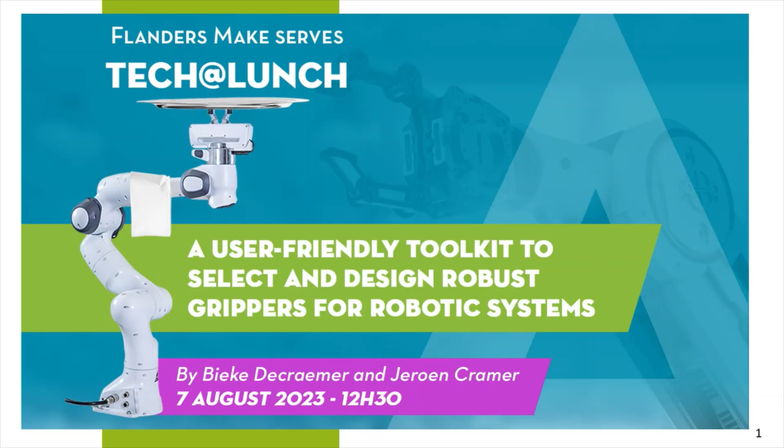We would like to welcome you at our Tech at Lunch webinar about a user-friendly toolkit we developed to select and design robust grippers for robotic systems.

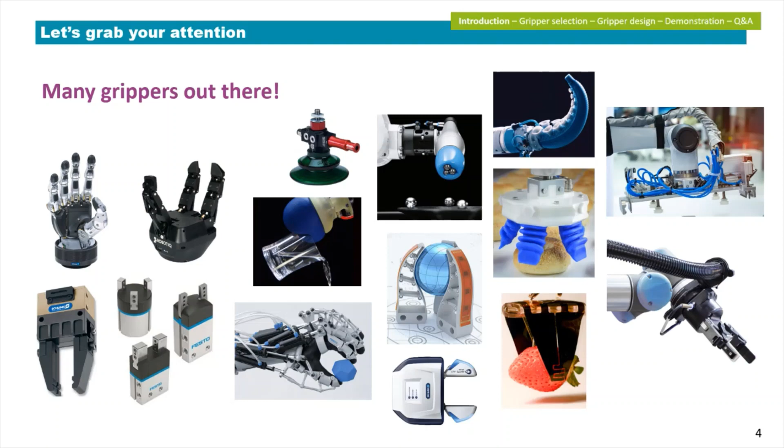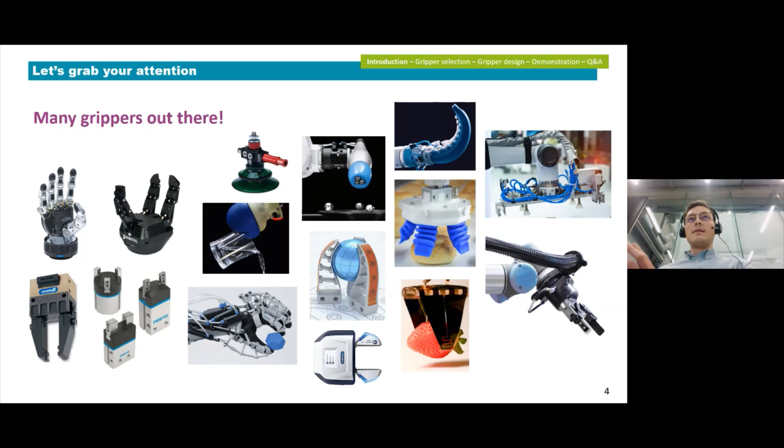Now, why do we focus on an assistive tool to develop robotic grippers? When you consider the shift towards more customized products, as well as soft products like food or textile, and the deployment of robotic grippers in more dynamic environments, like, for instance, human-robot collaboration, you can see that the expected functionalities of robotic grippers are evolving rapidly and are pushing both industry and academia towards the development of more innovative robotic grippers.

These developments are also endorsed by several market intelligence providers. They demonstrate that robotic grippers are a billion-dollar industry and still have a growth potential for the upcoming decade. This should come as no surprise because companies are increasingly optimizing their production efficiency on their production floor by integrating industrial robots which interact with their environment by using robotic grippers as an interface.

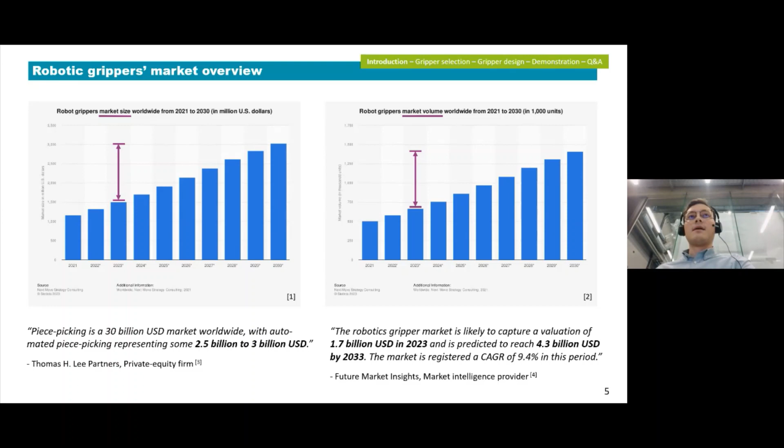But besides those economical advantages, there are still some financial and practical challenges ahead. For example, no less than 15 to 70% of the total product cost is spent on handling, for which the gripper cost can even reach up to 20% of the robot cost. So the performance and the durability of a robotic gripper are strongly influenced by the properties of the part to be handled and the task to be executed. So a well-thought gripper selection and design is of significant financial importance.

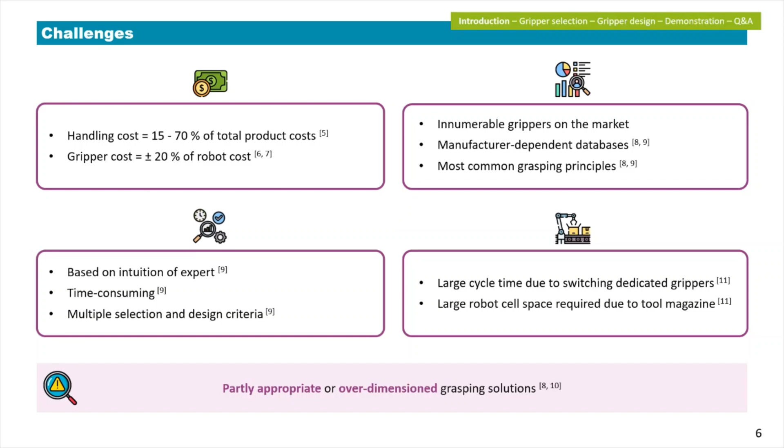Nowadays, in industry, gripper selection and design are mainly done based on expert knowledge due to its intuitive, ad hoc, and time-consuming nature. More specifically, innumerable grippers of various manufacturers are on the market, and multiple selection and design criteria need to be taken into account. In addition, gripper selection is mainly restricted to the portfolio of one specific manufacturer of robotic grippers and is confined to its most common grasping principles like jaw grippers or suction cups.

Furthermore, when using a dedicated gripper to perform one specific task, for instance, grasping an object, the cycle time and robotic cell space will increase due to constantly switching robotic grippers from a tool magazine. So as a result, this approach is susceptible to additional costs, which are entailed by partially appropriate or over-dimensioned grasping solutions.

Our toolkit tries to provide an answer to this by first providing a gripper selection tool, which is linked to a manufacturer-independent database consisting of more than 6,000 commercially available grippers, with the goal to assist inexperienced persons in a user-friendly manner. But for this, the standardization of grasping principles is required, as well as the standardization and limitation of selection criteria. This gripper selection will then result into a list of feasible grippers for the family of objects that are given by the user of our toolkit. These objects could range from 3D mechatronic parts up to 2D sheet metal parts, or even soft organic products.

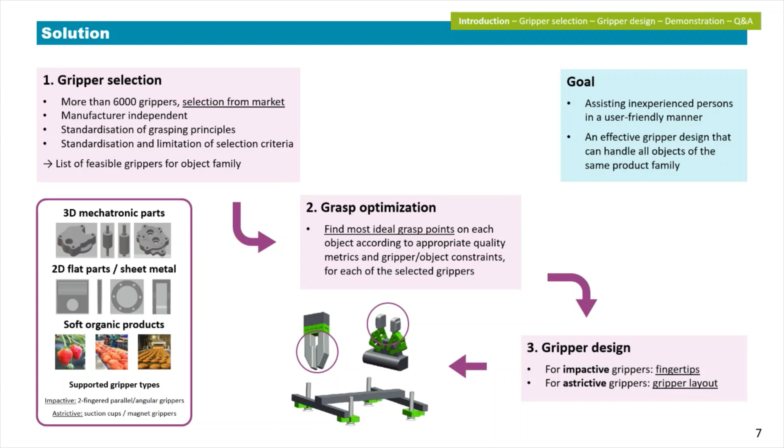Then, in the second stage, the grasp optimization will find the most ideal grasping points on each object for all of these selected grippers, based on quality metrics and constraints about the gripper and the object. And then finally, this will result into a gripper design that can handle all the objects of the same product family. For impactive grippers, which generate a contact force on the object, this means the design of fingertips. For astrictive grippers, which generate a force field onto the object, this means the design of a layout of individually positioned grippers, as illustrated by the picture down below.

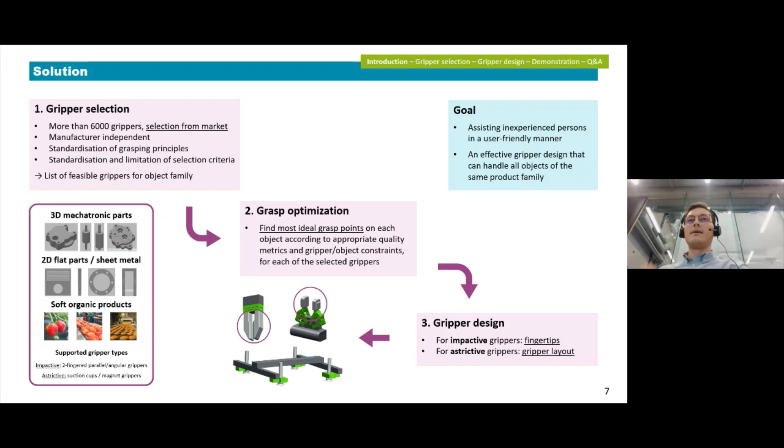The importance of gripper selection has also been noted by several gripper manufacturers. They increasingly provide accessibility to their product portfolio by offering digital catalogs on their websites, as well as assistive web tools. But with our toolkit, we would like to take this a step further by not only focusing on one specific gripper type, like impactive grippers, and also not restricting ourselves to one specific manufacturer.

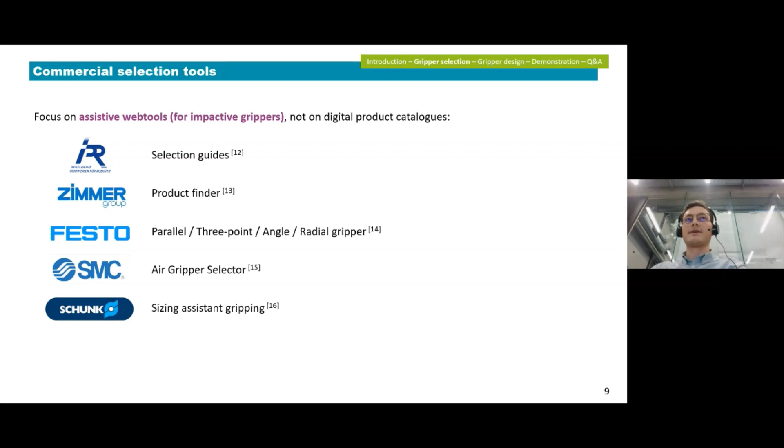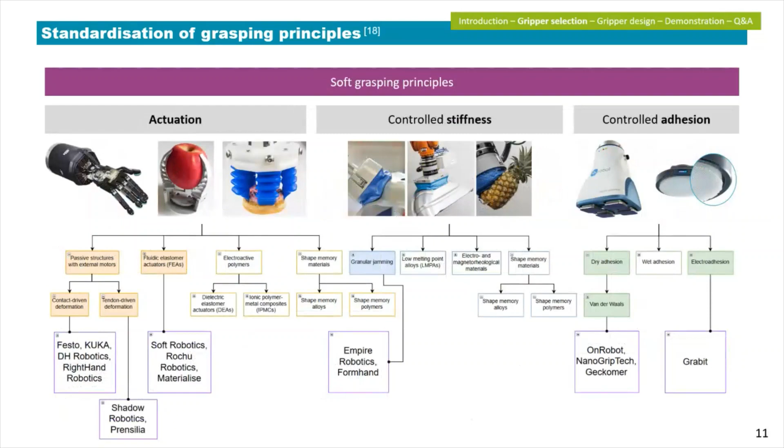This is done by first integrating this standardized tree diagram for conventional grippers as well as soft grippers into our selection methodology, and limiting selection criteria to the 35 most important ones, which we derived in close collaboration with our industrial partners, and dividing these selection criteria into 5 categories: the object to be grasped, the task to be executed, the environment in which the robot operates, the robot itself, and some gripper parameters.

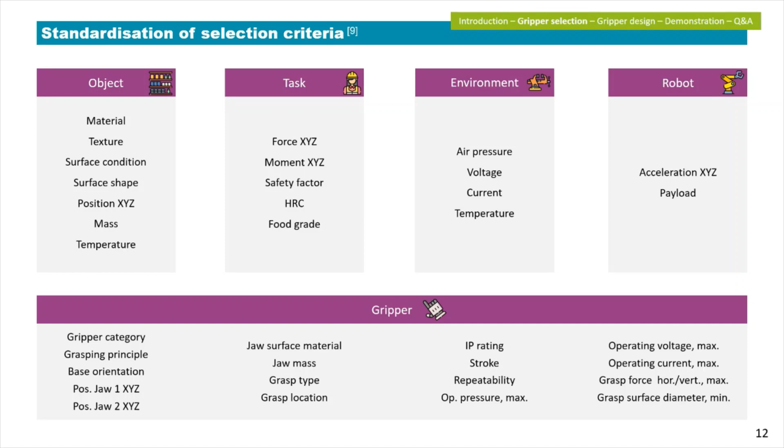This will result in a pipeline for our selection methodology that runs in 3 main steps. First of all, in the input stage in the back end, gripper data needs to be collected and stored into our database. This can be done manually or automatically by using web scraping of the digital catalogs of gripper manufacturers.

In the front end, the user has to specify certain values for the selection criteria he is aware of about his intended gripper or the envisioned use case. And then during the processing step, gripper selection is done based on rules which match the selection criteria with the grippers in our database. And this results in an interactive output.

First of all, a 2D scatter plot in which you can interact, or a data table which allows some additional filtering and gives a direct link to the website of the gripper manufacturers. Then finally, in the table on the right-hand side, you can see an overview of the various gripper manufacturers and grasping principles that are currently stored in our database, which contains more than 6,000 commercially available grippers.

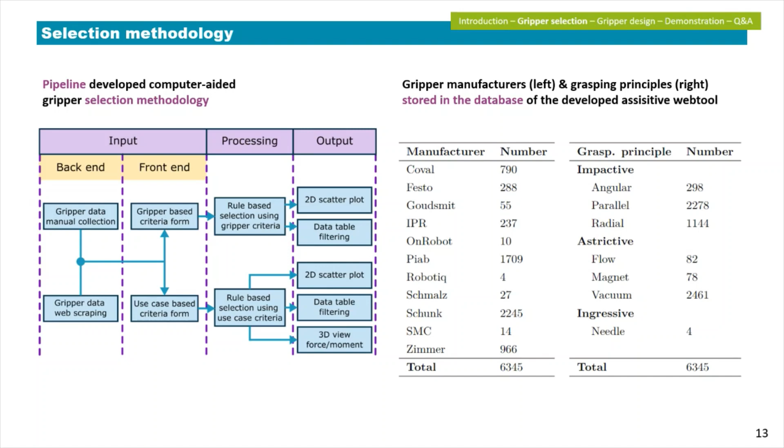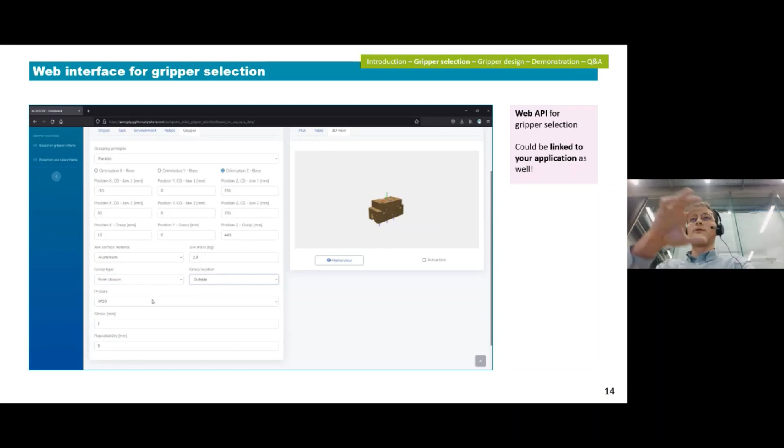And for this selection methodology, we created a standalone web interface that on the right-hand side allows some interaction with a 2D scatter plot and an intelligent data table. And a gripper selection is done based on the values for the selection criteria the user has to provide on the left-hand side. And the selection criteria are divided over the 5 categories I mentioned earlier. This 3D view allows us to provide some forces and moments on the gripper.

And finally, we get a hit list of feasible grippers with a direct link to the website of the gripper manufacturer, where you can order the gripper or where you can get in contact with the gripper manufacturer's sales department. Then finally, I would like to mention that we also created a web API for our database and the selection tool, which is linked with the design application you will see in a minute. But this web API could also be linked with your application as well.

The next step in providing a good gripper solution is then, for the gripper that Jeroen selected with his tool, to make a good design for it. This falls into two categories. On the one hand, we will design fingers for the impactive grippers that were selected. And on the other hand, we will design layouts for the astrictive grippers, such as suction cups, which are selected by the selection tool.

How do we do this? Well, this is a two-step process. First, we optimize the exact location on the objects where we want to make the gripper contact the objects. First, we need as input the objects and the selected grippers of the selection tool. As a first step, we then reduce the objects to the feasible contact surfaces. So we find all feasible contact points between gripper and the objects.

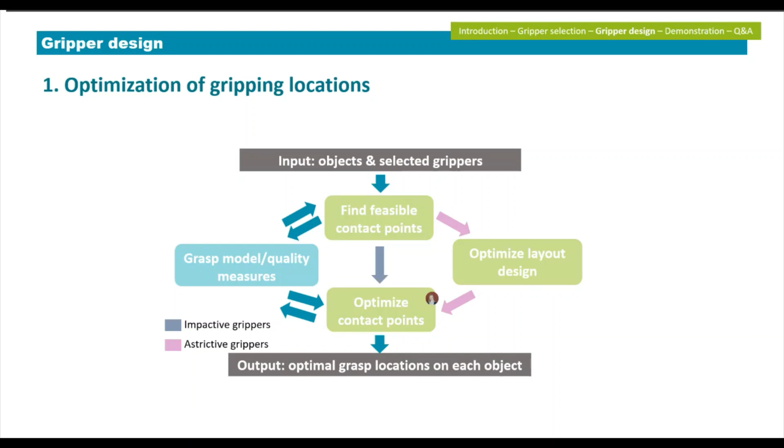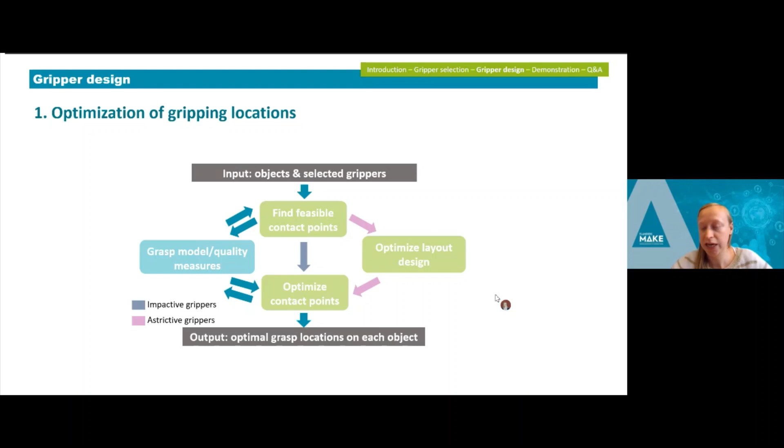Next, for the astrictive grippers, we go into layout optimization, where we first optimize how the layout of all the grippers needs to be together. And then finally, for both impactive and astrictive grippers, we optimize the exact contact point where the gripper needs to make contact with the object. For all these steps, we are helped by grasp modeling and quality measures, which take into account the physical properties of the gripper making contact with the object, and that way finding good grasps. As an output of this optimization, we finally get the optimal grasp locations on each object for a certain gripper.

As a first step, as I said, we just need to find the feasible contact points. Here I took an example of a 3D mechatronic object, which we want to grasp with an impactive gripper approaching from the top. This means that there are certain constraints placed on the object where we can grip it. If we approach this object from the top with an impactive gripper, this impactive gripper will have a certain maximal finger length. Let us say that this is this length, then you can see easily that this puts a constraint that only the top surfaces, limited to here, are graspable by this gripper.

Additionally, we also want to stay away from sharp edges, because we know from experience that a grasp at a sharp edge is bad for grasping. So that's why we also limit to all contact points which are far enough from a sharp edge, which are here indicated and recognized automatically as the lines in blue.

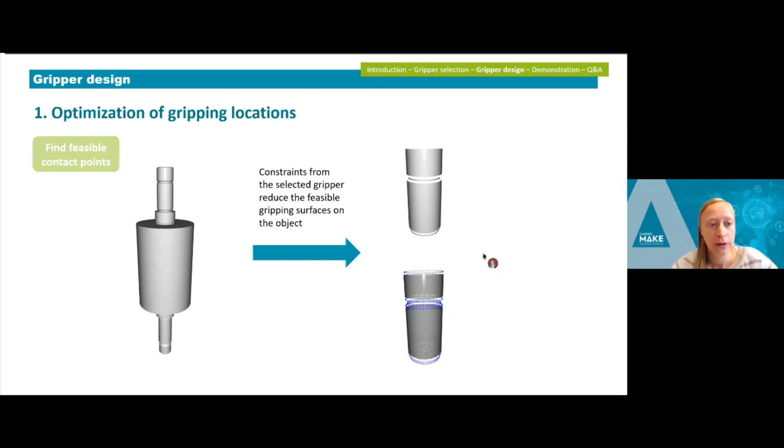Then next, we want to optimize the gripping locations. First, for the astrictive grippers, we want to find the optimal layout design. And for this, we need to generate first a lot of feasible candidate grasps for each of the objects. So say that we have 4 objects, we generate a large number, up to 200 or 500, depending on how big and how long you want to optimize for, of feasible candidate grasps for each object, and then we parameterize each grasp by the set of distances between the points.

So here we are actually trying to find a layout of 3 points. So for example, 3 suction cups, and then we parameterize them by 3 distances between these 3 points on each object. Finally, we optimize a common grasp, here depicted in pink, that is most similar to the best grasp on each object. And by most similar, we mean that the distance error between each of these 4 and the common grasp that we find is minimal. This way, we actually find the final layout design that we want to place on each of the candidate objects.

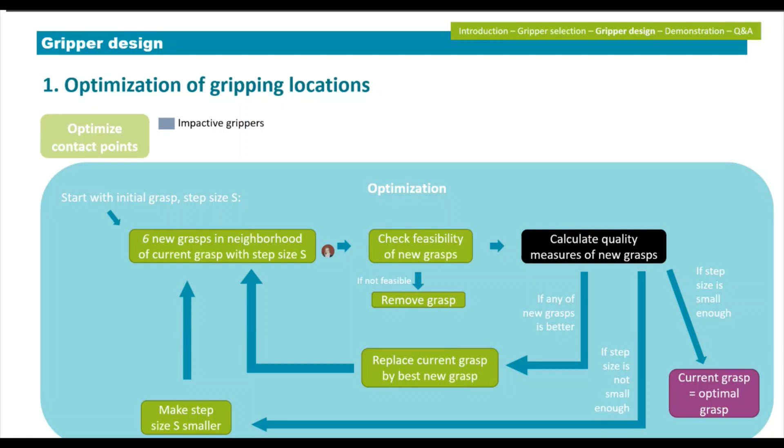For each of these 6 new grasps, we check the feasibility of the new grasp, and if it's not feasible, we remove it from the set. By the way, because we selected the feasible regions in the first step of the full optimization procedure, we know that there will always be at least one grasp in a neighborhood which will be feasible. So we will never get an empty set in this step.

For each of the new grasps, we then calculate the quality measure of these new grasps. And if any of them is better, then we replace the current grasp by the best new grasp and we start again to see if we can move further towards a better grasp according to the quality measure.

If we didn't find any new grasp to be better, we check if our step size is already small enough. If it's not small enough, we first reduce the step size and see if we can find in a smaller neighborhood a better grasp in the same iterative procedure. If the step size is small enough, then we say our current grasp is actually our optimal grasp on the object, and we have found our optimal grasp.

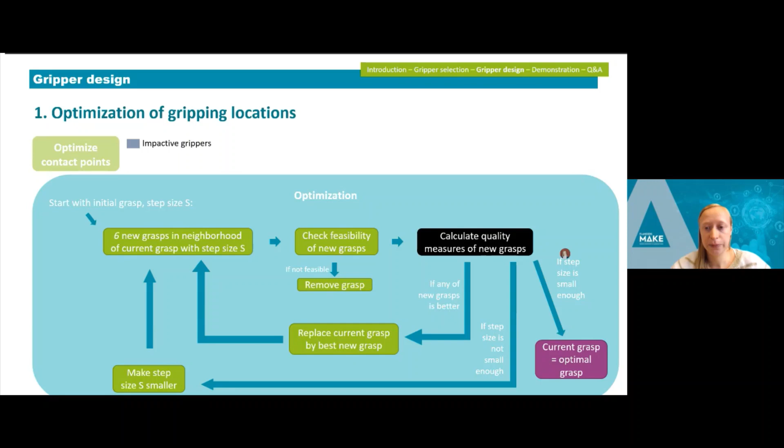For the astrictive grippers, we actually follow the exact same optimization routine, only there the quality measure with which we measure how good the grasp is on the object is now the distance between our candidate grasp currently on the object and the common grasp that we want to have as the layout of our gripper in the end. So this actually modifies the candidate object grasp to come as close as possible to the common grasp layout and thus create a gripper that can select all objects at the same time.

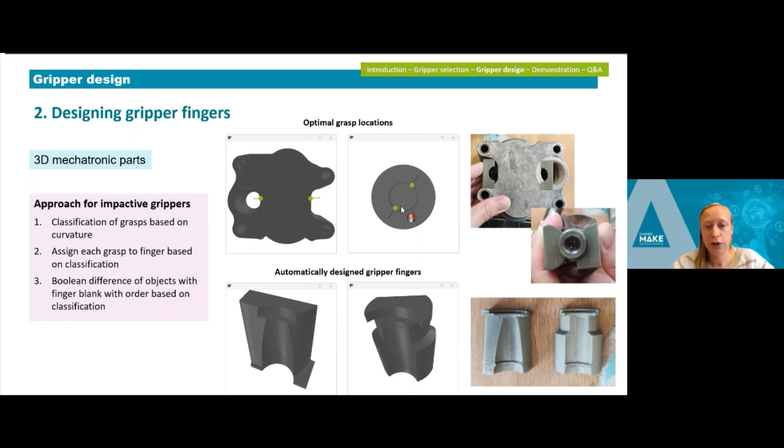Next, we want to actually also design the gripper itself from the best grasp location that we found on the objects. For 3D mechatronic parts, we mostly select impactive grippers. So for them, we want to design gripper fingers. We first do a classification of the optimal grasp locations that we found on the objects based on their local curvatures. This classification helps bring together equally curved grasp locations on the different objects, in this way making the most similar grasps be put on the same finger.

Finally, we do a Boolean difference from a finger blank based on an ordering, also based on curvature, and that way create an automatically designed finger. These are provided in STL format and can easily be 3D printed and also tested on your objects.

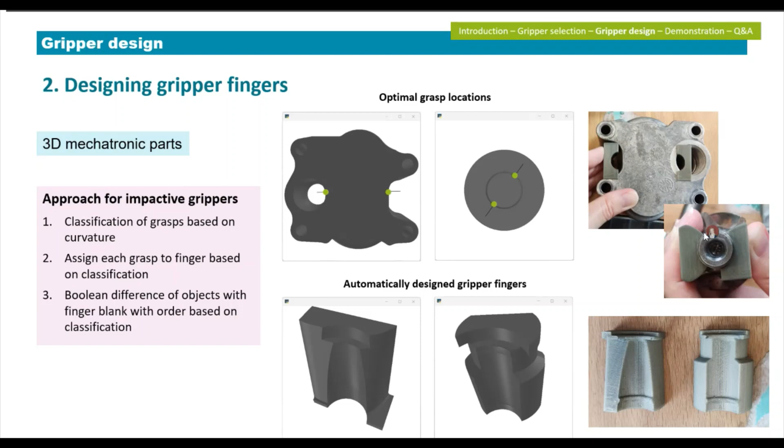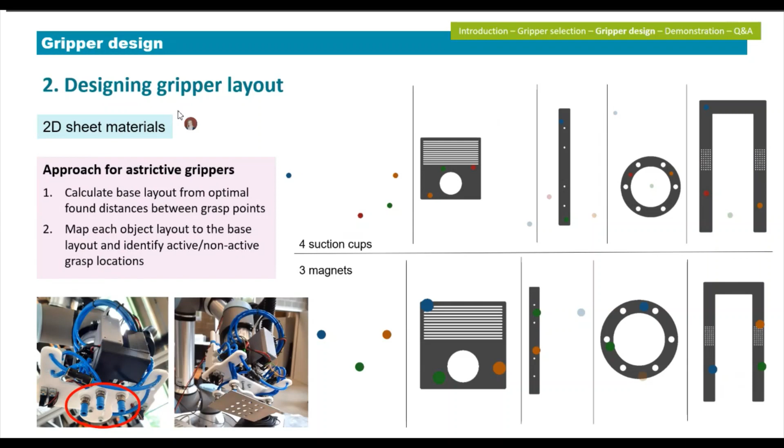For 2D materials, mostly sheet metal, but also other parts are possible, we calculate the base layout from these optimal found distances between the grasp points, and then we map each of the object layouts to this base layout. And you can also see here in the top example that we can activate or deactivate certain grippers. This gives a lot more freedom in your gripper solution.

Otherwise, this thin object would absolutely not be able to be grasped with the same gripper as this much larger square object or this circle. But playing with the activity of certain grippers in your layout can certainly help this.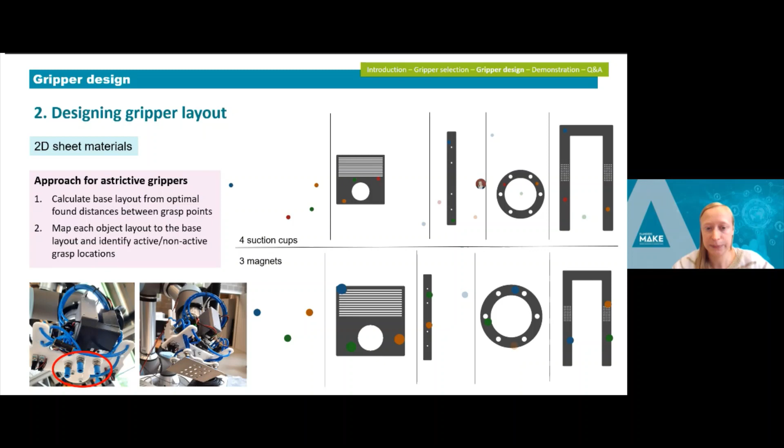Next, we converge all these solutions that we just presented, so the selection, the optimization, and the gripper design, into one user-friendly toolkit, which we will now demonstrate to you. So a first step that you can do with this toolkit is to obtain automatically the best selected grippers. For this, we first log into the database with credentials that you can get from us. If you provided anything wrong in the GUI, it will nicely show you in red, and if it's right, it will turn green to make it user-friendly.

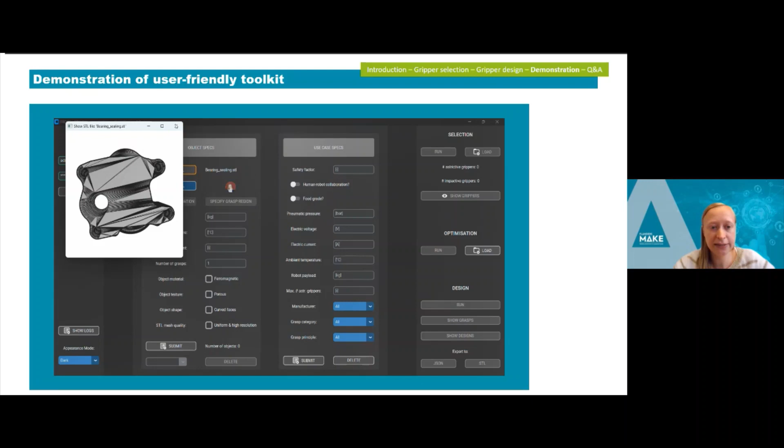Next, in the second step, you need to upload your objects. These are STL files of your objects that you need to load in. You can show the STL, and then you need to provide some object properties that will help us gain knowledge about the objects for the optimization and selection. Since this is a tool developed to handle product families, we want you to upload at least 2 different objects. That's why the submit button only becomes green after submitting at least 2 objects.

Finally, you can also delete objects. This you can do by popping open the menu where you see all objects that you have entered and then selecting one and deleting it. Next, we want you to provide the use case specification. These are the selection parameters that Jeroen talked about for the gripper selection.

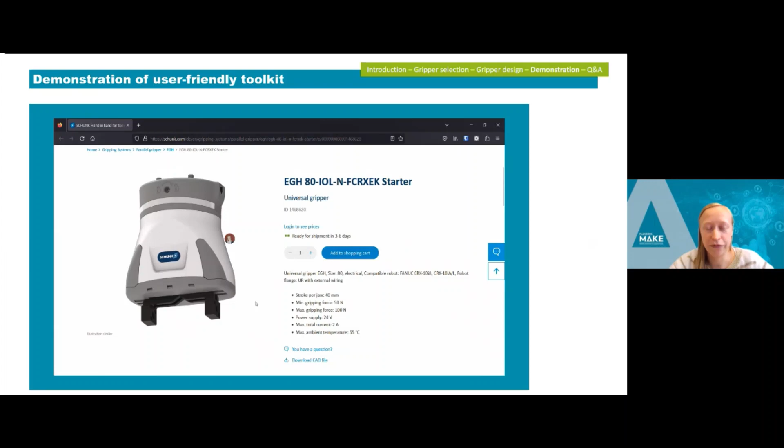And once you have submitted these, you can run the selection itself by clicking on Run in the selection panel. Then we give you the information about how many grippers were selected, and in the log file you can also see more about this. If you click on Show Grippers, you see the 5 top grippers that were selected, and you can also automatically go to the page of the commercial provider of the selected grippers.

As a second option, you can also load in a gripper yourself. For example, if you already have a gripper in-house and you want only to do the design part for this specific gripper, this is possible by loading the gripper parameters of that selected gripper yourself. As a first step, you need to again load all your object data. And then in the selection menu, you can click the Load button for loading a gripper.

And this opens the gripper specification menu. There you can select the properties for your specific gripper. And it shows you also when some things are not relevant anymore, they fall blank, and you also only have to provide the fields that are necessary. If you miss some fields, also here again, the color will show red and you can't submit a gripper. Also, submitted grippers can again be deleted in the same way as for objects.

There's also another way you can load this information if you log into the database again and the gripper that you have in-house is also in the database. You can, through the load menu, type your gripper name and find it in the database. Then automatically all the relevant information will be loaded in for your gripper. You only need to submit then the safety factor that you want and the maximum number of astrictive grippers in your layout in the case of an astrictive gripper. By clicking Specify, the grippers are then checked against the objects.

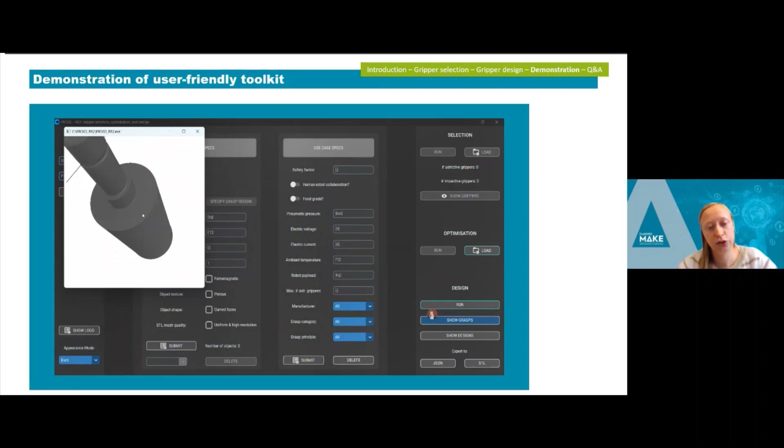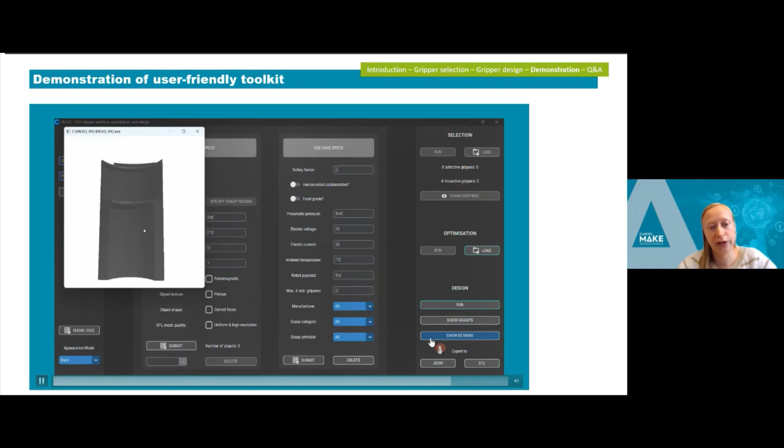Next, we want to go to the design of the gripper fingers or the layout. This is the last panel in our GUI. And if you click Run, it will make either the finger design or the layout design. So here we have an example of a finger design where with Show Grasps, you can see the grasp that wants to be picked on every object. And then finally with Show Designs, we show the actual finger design that was made for your objects and selected gripper. These two can be exported to either JSON or STL.

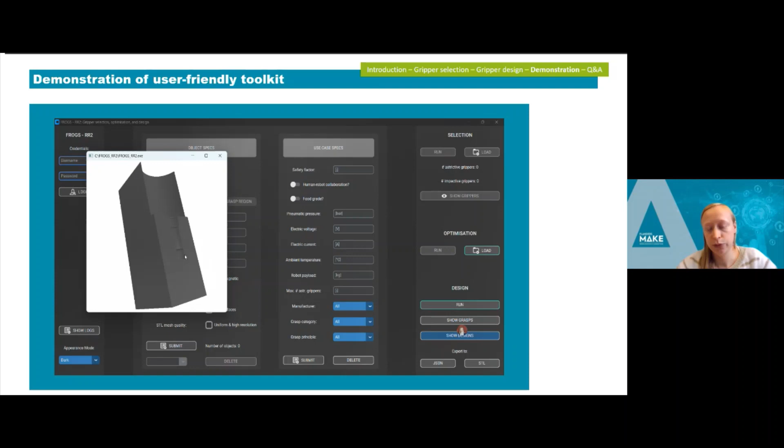The JSON file contains all the grasp information of the optimal grasps that were found for the grippers. And the STL files contain the designed fingers. These you can then load into your preferred CAD software where you can adapt them to the base of the finger that you have, the base of the gripper that you have selected, or you can just 3D print them and test them out on your objects.

So finally, as a conclusion, we had the goal of assisting inexperienced persons in a user-friendly manner to make an effective gripper design that can handle all objects of the same product family. And we have reached this by making a database and web interface for gripper selection and a desktop tool for gripper design. We tested it for both 3D mechatronic products with finger design and for flat sheet metal products with a suction gripper layout design.